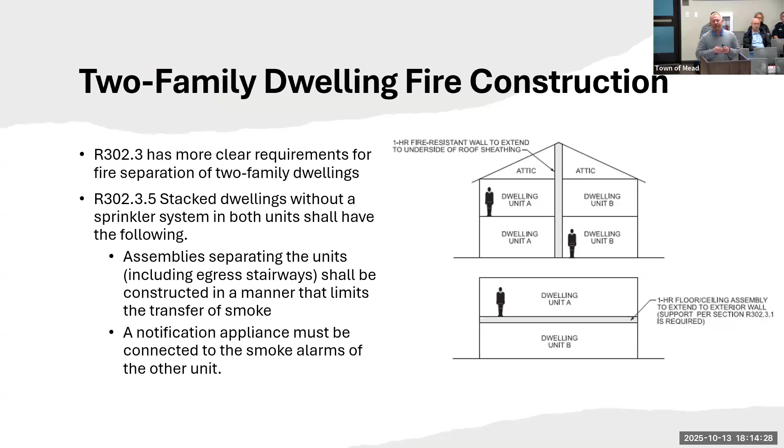There were some modifications to 2-family dwelling regulations. Years ago, we used to refer to these as a duplex, but the code has always referred to them as a 2-family dwelling. As you can see in the illustration, we can divide those in 2 different ways, either vertically in the top picture, or horizontally in that bottom picture, being 2 dwelling units, top and bottom.

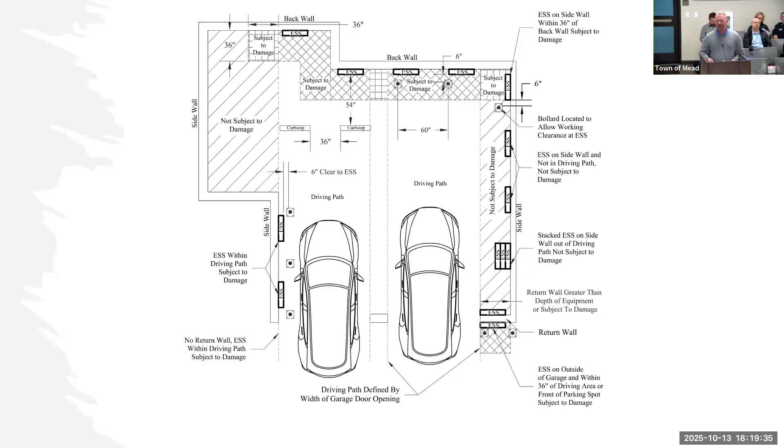This illustration might be a little hard to see, but at the back of the garage where those batteries are laid out, the hashed area is the area we're protecting. The area to the right of the vehicle parked on the right side of the garage would not be, because there's an expectation that the vehicle pulls in straight. We're protecting the wall at the back of the garage so no one can run into those batteries, and they can be protected with just a bollard system—a physical barrier that would stop the vehicle before impacting the batteries.

Some other clarifications in the code: additional supports for guardrails, whether that guardrail be at the stair or at the landing up top. This defines some more information, in the event that someone's leaning on that guardrail—and you can imagine if it failed, it could be a tragic situation depending on how far the fall is.

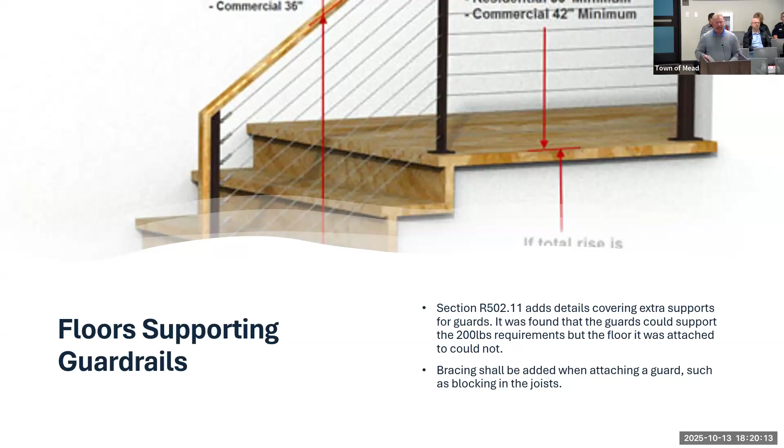Here's another minor update. Most homes these days probably have a deck mounted at the outside of the house. This gives some more clarification on how to create a weather barrier so that while that deck is attached to the house, it's creating a more long-lasting situation, resisting moisture getting back into the exterior wall of the home.

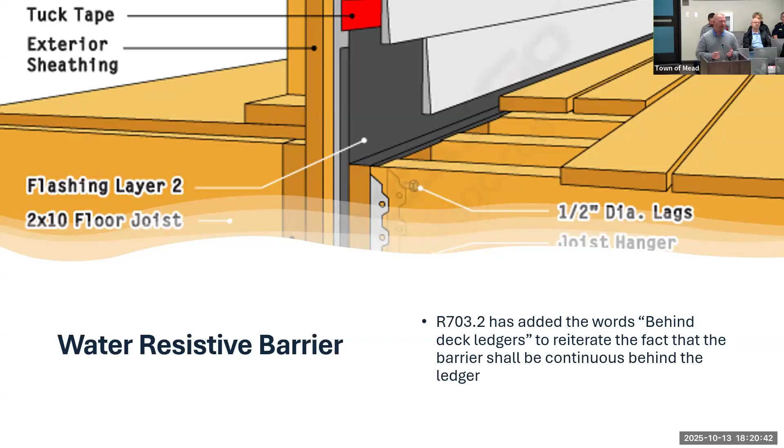Energy. I didn't make these slides, but I appreciate the...

So there's always been several ways to approach the energy code. We use the word energy code, and really that's just talking about the insulation on the exterior walls and the attic space of the house, maybe even underneath if there's a crawl space.

This is just outlining that there is a prescriptive method. The International Residential Code allows a builder to use the book prescriptively and follow its guidance. Now, because I'm familiar with Mead and some of the home builders that have been here in the past and probably moving forward, there's a simulated performance approach, which they're very used to doing. They have professionals on staff that submit documentation to us.

The simulated approach or performance might even lessen overall some of the insulation factors involved in those exterior walls and attic, possibly even with the ratings on the windows that are put into the home. But there is an equation that allows for manipulating these factors throughout the house, depending on its size, depending on the number of windows.

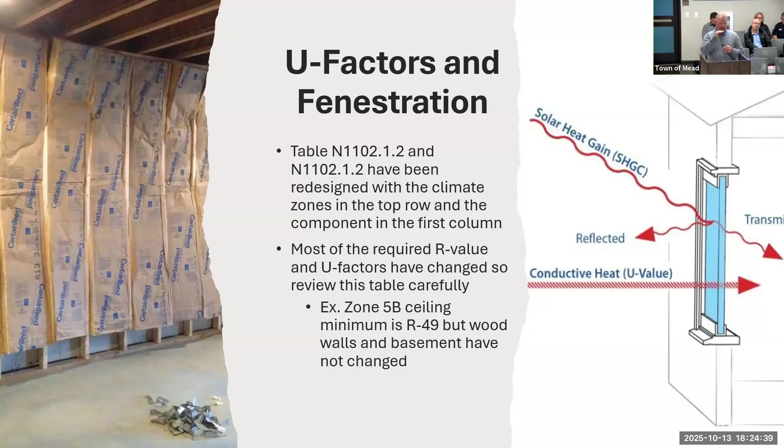So this is just a snippet out of the book itself. As you can see, the town of Mead is currently enforcing the 2018, and you can see a side-by-side comparison to what the 2024 will do. What you don't see is the comparison to the 21.

In the 21, say for instance, the ceiling R-value in the 21, as of today, if that were adopted, it would be 60. You see that the R-value for ceilings was 49 in 2018 and would remain the same.

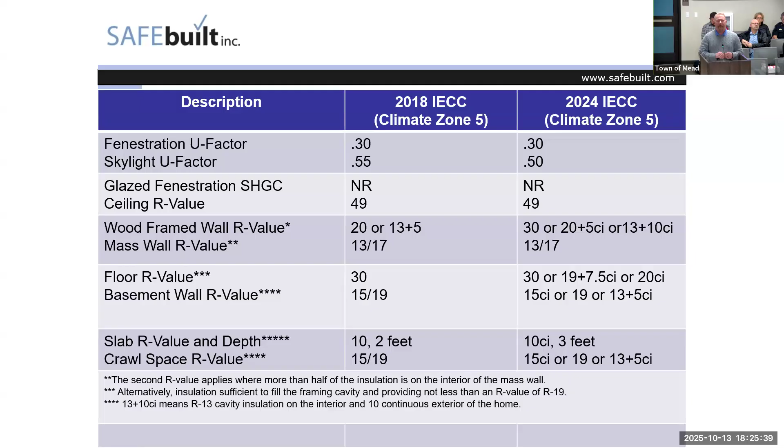There is an increase in the exterior wall or the wood-framed wall. But with insulation technology—blown-in insulation, closed cell, open cell, foam—these standards are pretty easy to achieve these days.

Duct leakage—this is something that we've always been measuring. When you're putting forced air through a mechanical system in your home, most everyone has what we call a forced air furnace with an air conditioner attached, that heats or cools the air within that unit and then pushes it into a duct system, in most situations formed out of metal.

So this process just measures the efficiency of that. They do a pressure test with a device like this, and overall it provides the most efficiency for that unit. It will also help lengthen the lifespan of it too.

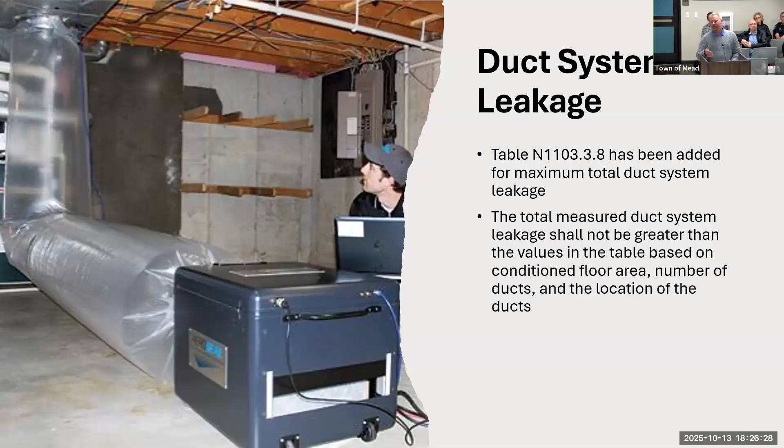Townhomes, so unit sampling—a builder that's building multiple townhomes could use this unit sampling out of this section of the book, along with that ventilation system or forced air furnace, so they're not going through to test every single unit. It really just provides a cost relief overall.

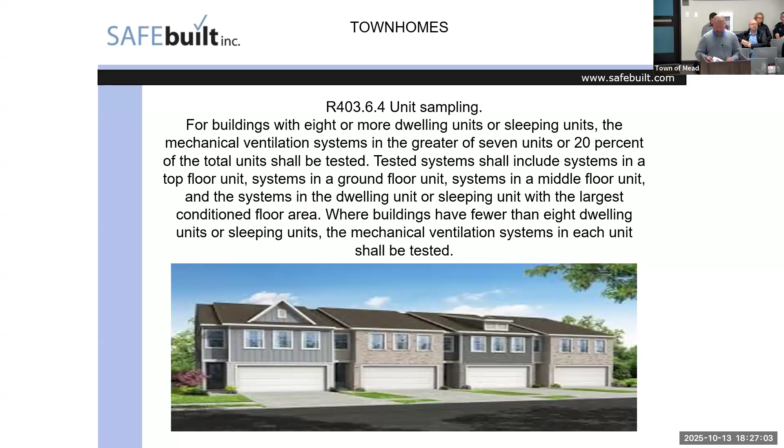All right, so now we're going to be more targeted on the energy code. Let's move on to the next slide. I think we can get into some more information on this.

So the Energy Heel Truss, that was created when going from the 2018 to the 2021. What this does, if you're familiar with this type of construction, is use a truss that has a very high heel at the exterior wall. If we insulate at the required amount in the middle of the attic space, as we get out to the edges at the exterior wall, that R-value gets thin.

So the Energy Heel Truss was created so that it kept that insulation more consistent, because we're losing energy—heating air and losing it through the attic space because hot air rises. So this was a method that helped mitigate that heat loss.

Now, I will say it is not required to use the Energy Heel Truss. There is a method to use a standard instead, because this could make the roof line look offset, or maybe a builder has a framing style they do not want to use this with. So there is a method to increase the insulation in the middle to create an average.

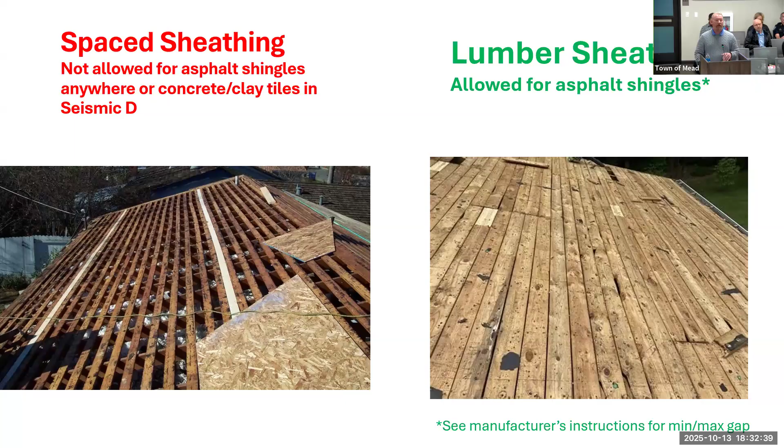Now, some minor changes to the mechanical code. As you can see, like a clothes dryer, because it's moving air and forcing that air outside — it's warming air to dry your clothes, forcing that air outside — this 100 square inch register is going to allow, if it's in a room that's closed in, we want to make sure we're providing what we call makeup air. We're forcing the air outside, and if it's in a small room with the door closed, now we're going to create a negative pressure inside the room. So it's a minor change, pretty easy to install a 100 square inch register that would allow air to pass through, maybe even from another part of the home.

The next section: exhaust openings can terminate 1 foot above windows and doors. I think we had a 3 foot requirement before that.

And this T&P valve — everyone has one of those on their hot water heater — they've condensed those requirements down in the book.

Now this refrigeration system — we see refrigerant change a lot over the years. It's mandated at a federal level as far as I know, so the industry has to react and change. The code will follow that, and then of course write in and include these new refrigerant types.

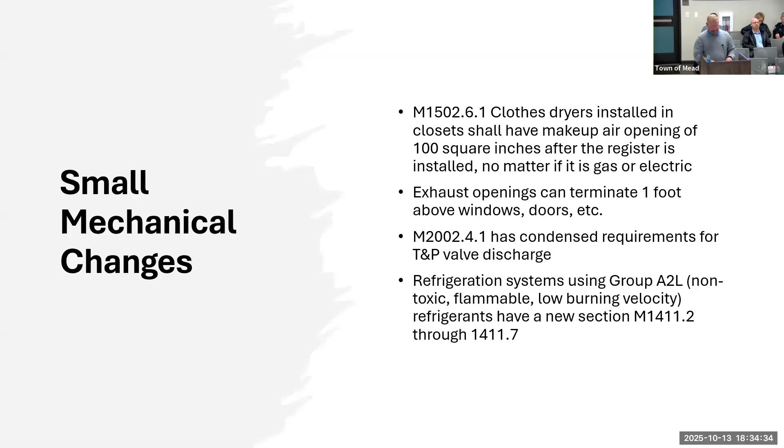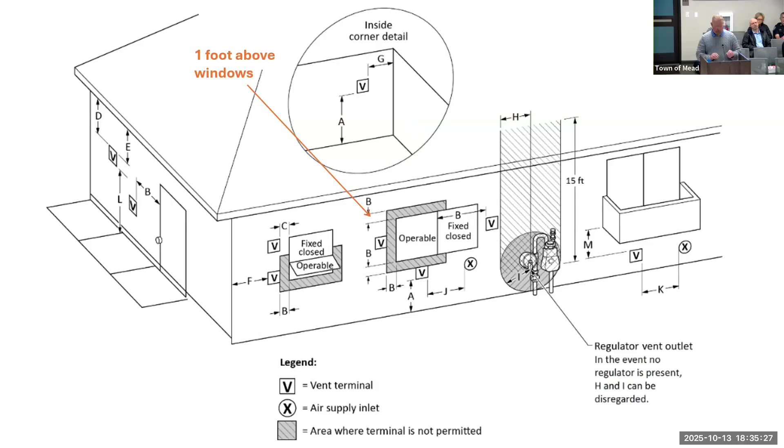The next slide is just outlining that one foot above a window or a door, whatever it might be.

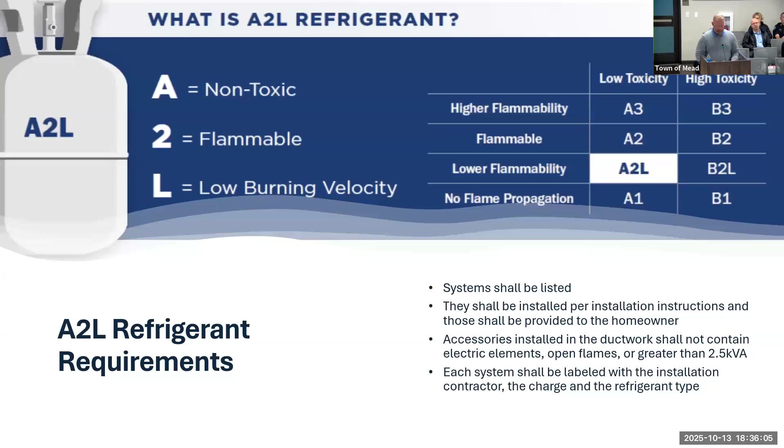A little bit more information here, though this isn't out of the code book, just general information about the new refrigerant. Everyone with an air conditioner unit will face this at some point when it needs serviced or replaced, because the old refrigerant type that's been in those units over the years is now not even allowed to be sold on the market. So things change, and that's not driven by the International Code Council, but more at a federal level and environmental.

This goes into the fuel gas section of the code book. This would apply every time you're supplying a furnace with natural gas, a water heater with natural gas, or even a fire pit or decorative fireplace that some homes have.

I like that they put this section in here: abandoned fuel gas piping shall be purged. We've had some moments up and down the Front Range of Colorado where there were old gas lines undiscovered, not part of the home, but through the property where the home existed. I can think of a situation about 6 to 8 years ago in Firestone, where a home was sitting on top of an old abandoned gas line. They built over the top of it, and it collected over time until it got to a point where a water heater pilot kicked on, or the furnace, and that ignition source caused an explosion in the home. So I'm glad they've defined this a little better.

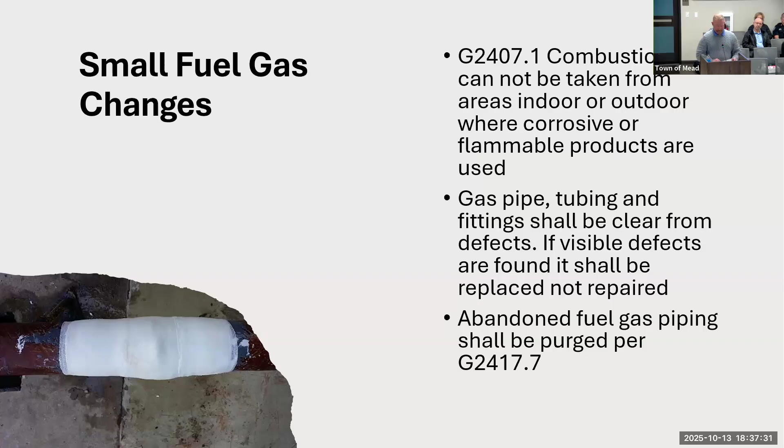Smoke and peppermint tests have been removed from drain waste and vent final testing. That was peppermint - I'm not of an age where I remember that being a popular method, it was many years ago. But you can imagine the strong smell of peppermint oil. They would introduce that to the inside of the drain waste and vent, or DWV, and then during the inspection process, walking down at each joint where it's glued or fitted together, we'd check for the presence of that peppermint odor.

I couldn't explain exactly why they've removed that, but I think it's probably a more antiquated testing style, because in my 22 years being in the field doing inspections, I've yet to come across someone that wanted to do a peppermint test. Now the smoke test is a similar scenario - we fill the pipe with smoke and then look for the area where that smoke visibly is coming out.

Air test has been replaced by a vacuum test. So instead of introducing compressed air inside of plastic drain pipe, which always carried a concern about that pipe bursting, now it's required to do a vacuum instead. This will require plumbers, maybe even HVAC professionals, to use a device that will put a vacuum, measure that vacuum, and let it sit for a desired amount of time to watch for any types of leaks that might happen.

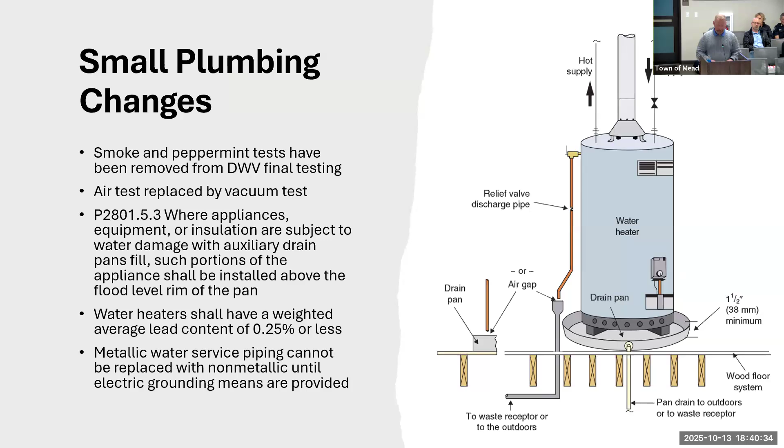Some reorganization of the appendices. Appendices, of course, are at the very back of the book - they are not recognized unless they are adopted by a council. This was just a reorganization of some of those. Some of them may not apply to a community of this size.

Now let's get into the Colorado Model Electric and Solar Ready Code. As you can see, it was introduced in July 2023. The code has become a requirement to adopt alongside the adoption of I-codes in the state. 90% of jurisdictions in the state have been using an updated version of the I-code, the International Code.

When the Colorado Energy Office formed in an effort to create more efficiency, the Colorado Model Electric Code requires that if you provide a gas dryer in a new home, you also have to provide the option for electric.

So if the person gets tired of using gas energy, maybe natural gas prices go up, they have the option to swap the dryer out with an electric version without having to go through a major expense, call an electrician, pulling in a new electrical line that would service that dryer.

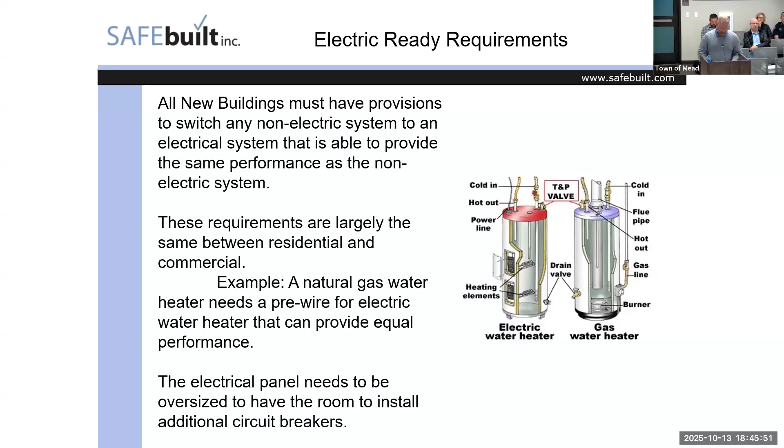And then you see at the bottom, so 2 spaces reserved for each appliance for a 2-pole breaker, because these appliances would require a 2-pole breaker, 240 volt. So as long as there's a dedicated space for those, they don't have to be installed. So that expense is not on the home builder, but it would have to be available - the space would have to be available.

All right, exceptions: a fireplace not used as a heat source or a main means of heating. As you can see the picture here, if you had a gas fireplace on your patio area outside, that's just decorative, so the requirement to provide an electric backup or source would not be required.

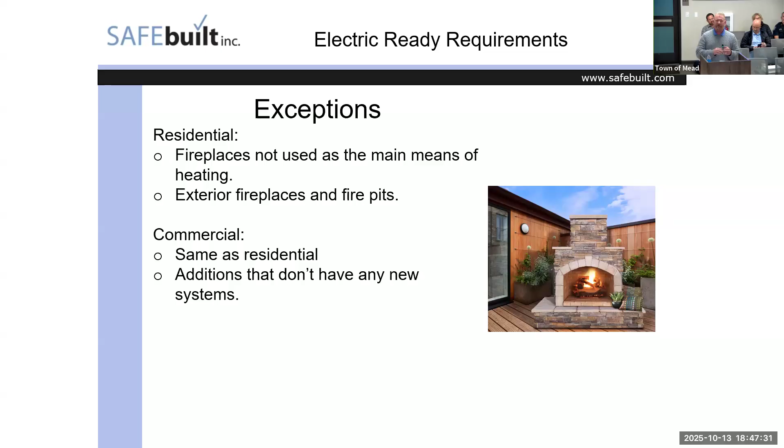So solar ready, this kind of just dives into the area on a roof. Most of us, if we don't have solar, just have shingled roofs or some type of roof covering. Most would meet these minimum requirements pretty easily - 300 square feet of space, oriented 110 to 270 degrees of true north. Any home that's built is probably going to have 4 sides to the roof in a sense.

So here's a good outline of a roof looking down. If you have driven past homes or have neighbors with solar, you've probably seen a similar situation. Again, some of these requirements are just reiterated in this slide, and you'll see at the bottom, a dedicated space within the panel.

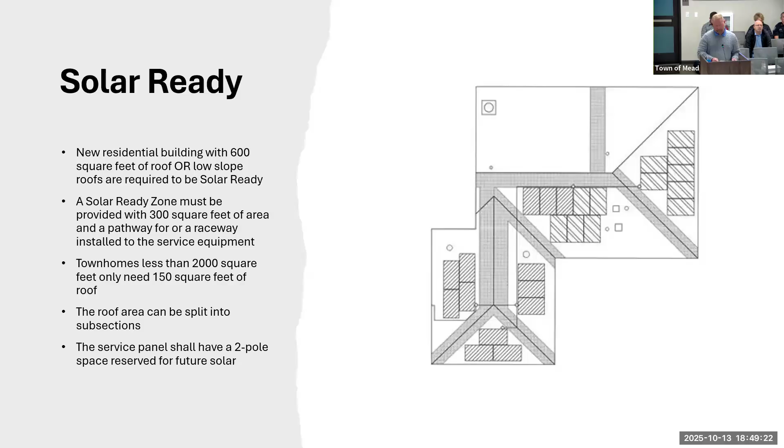I'm going to go to the next. Oh, there you go.

So this is targeting commercial - new buildings and major additions and renovations. Now the consideration of major, if it's an addition to a commercial building and if it's substantially increasing the square footage, to be honest I'd have to research what percentage that might look like, or a major renovation. If we're just renovating the interior of a building, that's not considered a major renovation. We would have to disrupt the exterior, disrupt the roof, and then maybe we're falling into that major renovation category.

And again, the language is similar - the orientation, the location of the area for the panels.

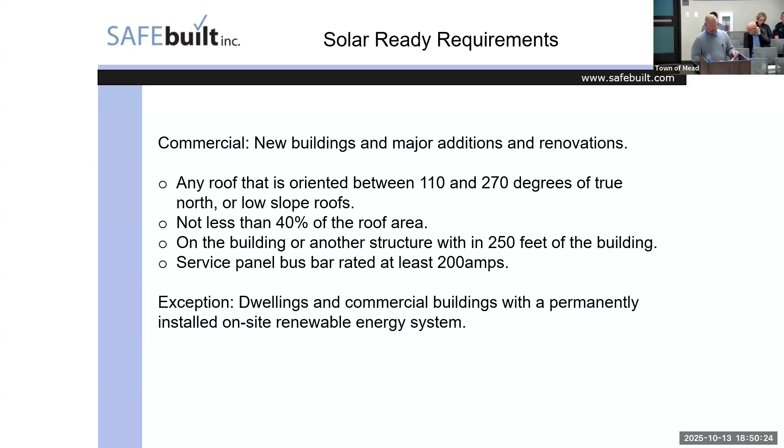So this is defining, we have 3 different levels there. EV capable, if we have space in the panel. EV ready, we have a panel with dedicated space and an outlet installed that can accommodate charging of an electric vehicle. And then installed, you see the charging station itself, whatever that might be.

I personally don't have an electric vehicle. I have a few friends, I think, that have them. It seems like their options are getting some type of charging device to charge the car quickly in the garage - a lot of expense in that, I think - versus when they purchased the vehicle, it came with some kind of charging cord they can plug in their garage to accommodate the charging of the vehicle. It takes longer, but you know.

So the EV ready is what we're focused on in the middle. We're going to make sure that when the home's built, that receptacle, meeting these minimum requirements - 40 amp, 240 volt - is available. I like to describe this like if I was building a brand new home and maybe I don't have the desire to purchase an electric vehicle - the average homeowner is in a home 6-7 years maybe, they sell the home, they move on, maybe they downsize, maybe buy something bigger as the family's getting bigger. They've sold it to someone else that has that EV car. So instead of that new homeowner having to tear the walls open, pull a new electric line in, maybe upgrade the panel, whatever it might be, this kind of circumvents that.

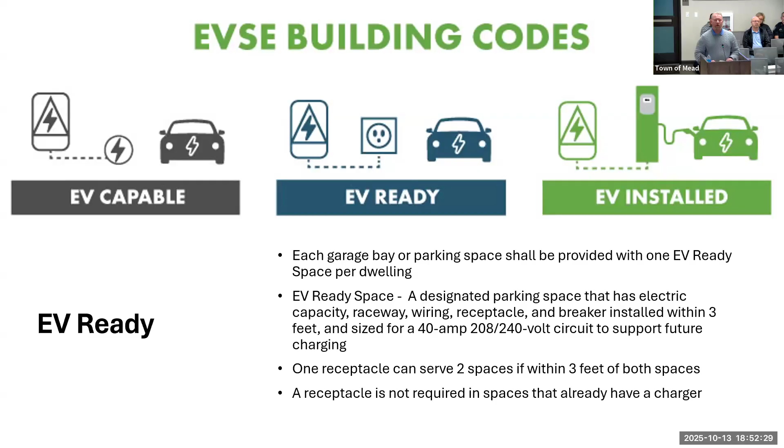We will go into the spaces, and I believe there is a slide that shows that. The Colorado Energy Office requires a charging station for each vehicle parking space. So if you have a 2-car garage, there's 2 parking spaces available. But there is a provision or exception that allows - if you're within 3 feet of the space - then 1 receptacle dedicated to EV charging can service both. They recognize that even if you had 2 EV vehicles in your home, you could charge one then the other, or accommodate both spaces with the single receptacle provided.

So I apologize, I'm not fully aware what that acronym stands for. David, would you?

So these things, our team or any inspector would be verifying these requirements are met based on the Colorado Model Energy Code. Obviously our team would do inspections on every aspect of the house during the building process. But then we're also going to make sure we're meeting this so that we can follow the state standard and not put the jurisdiction in any kind of jeopardy for not meeting that statute.

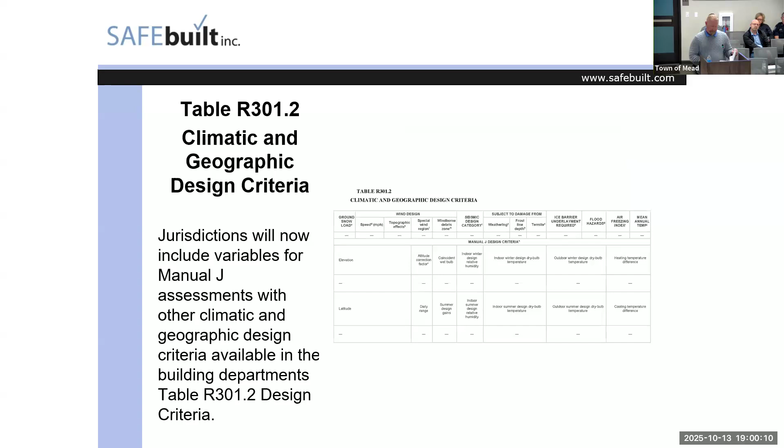Wind speed conversion, that's where we're taking what we refer to as a 3-second gust of wind and what we refer to as ultimate wind. So a 3-second gust or higher is sustained. In this area, I'll throw a number out, I don't know exactly, but it's probably around 115 to 120 miles an hour. You don't see that on a normal basis, but referring back to the Marshall Fire, I know they were having sustained constant wind at over 100 miles an hour, and that's what caused that fire to move so quickly. And that, as the crow flies, is not that far.

That's just based on this mountain range behind us. That inversion happens, that cold air drops, it gathers speed, and by the time it gets here, it's pretty powerful.

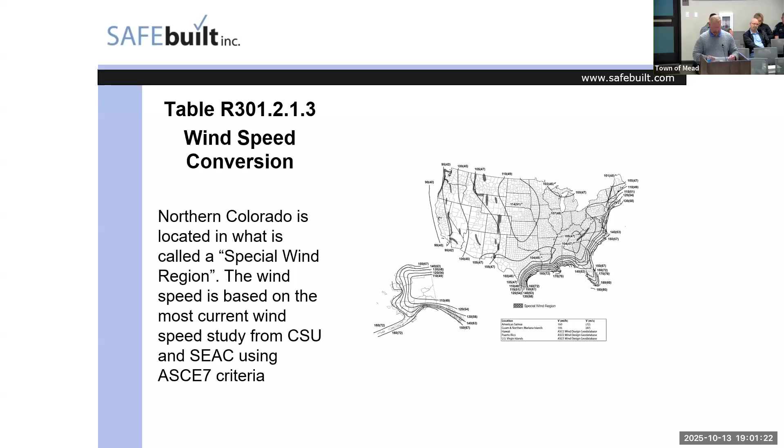Exposure category, this just defines where this comes from, the ASCE. These are groups of engineers that have done studies to determine different parts of the country, and this would be from coast to coast.

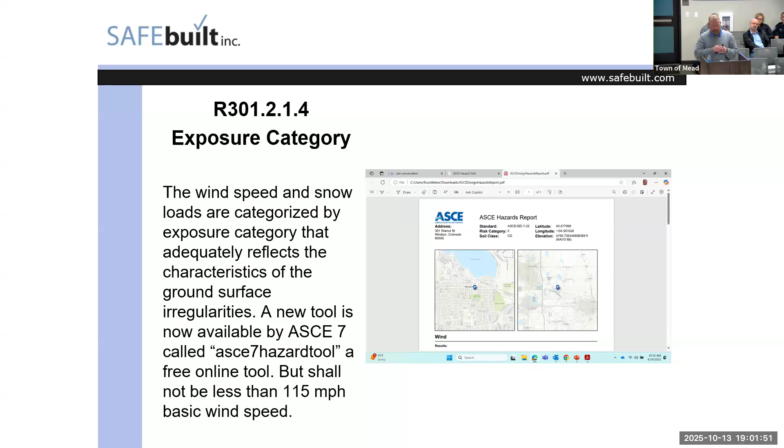We kind of touched on this earlier, 2-family dwelling or paired home or duplex, all words that we've used over the years. I think it's just adding new language. We've always had that requirement to have fire resistive rating between them, but this section is just defining that better.

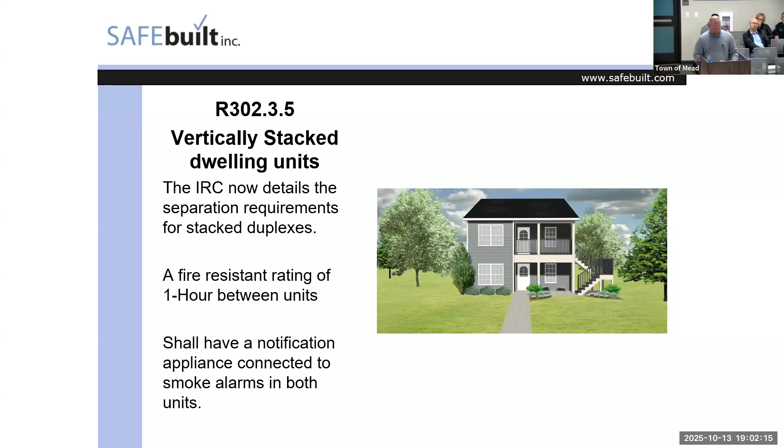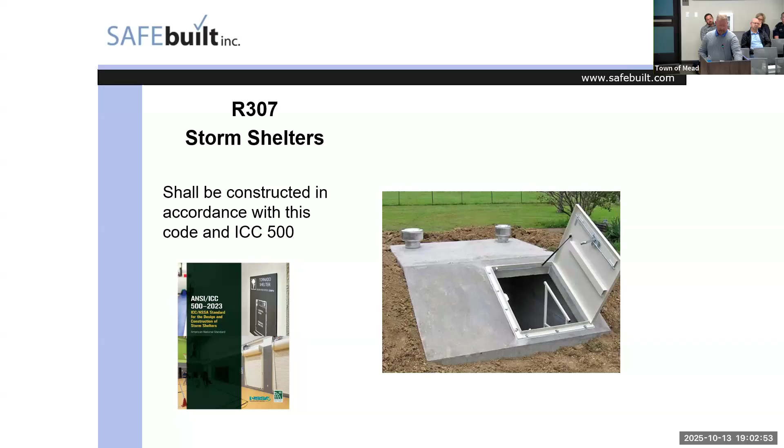A new standard that addresses lead content in drinking water. Obviously I feel like we're so much further away from that than we were many years ago, but it still becomes an issue in certain parts of the country. The code is written for international use, so some things may not pertain to the town of Mead, Colorado, but the book is written to accommodate areas all across the globe.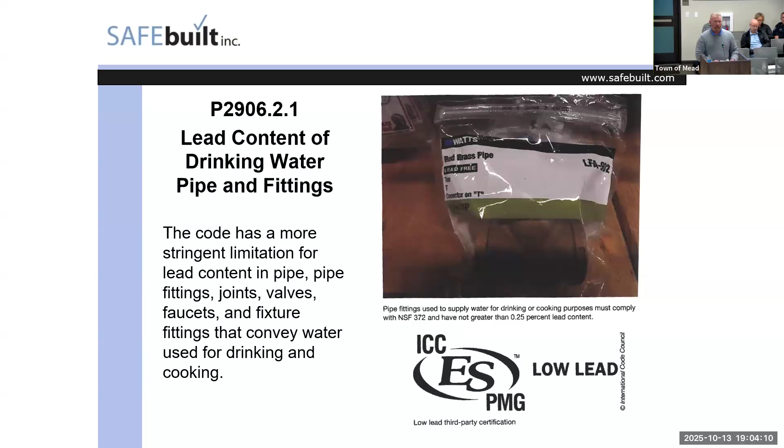A little tiny dive into the IBC, this would be your International Building Code, which governs commercial buildings.

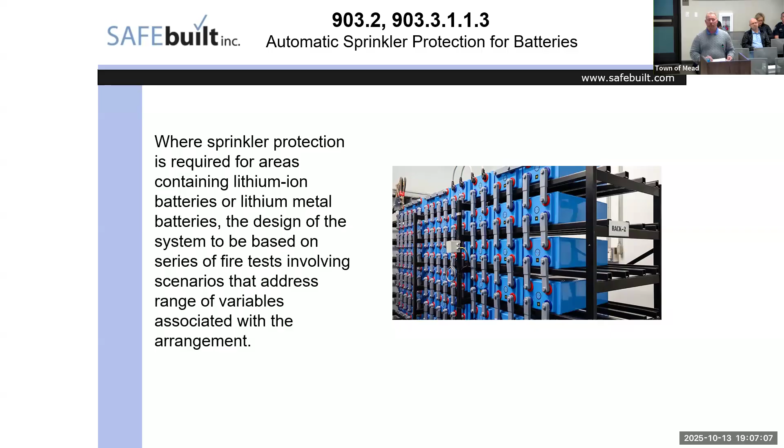And we talk about egress doors. Of course, in this building, we have egress doors, everywhere you see the marked exit, however we can get out of the house. In a single family home, your main egress door would be your front door that you're used to walking in and out of.

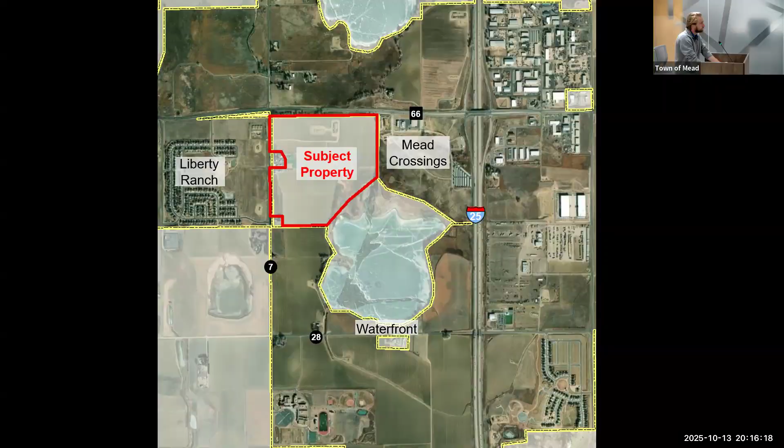In order to be eligible for annexation, the property in question must conform with several requirements outlined in the Colorado Revised State Statutes. These requirements include that 100% of property owners must have signed the annexation petition, that no other municipalities have commenced annexation, the property will not be detached from the current school district, the annexation will not separate or subdivide any land held in identical ownership, and the annexation will not extend the town's boundaries more than 3 miles in any direction.

With this proposed annexation, they meet all of these requirements. There's also a contiguity requirement - state statutes require property to have at least one-sixth contiguity with existing town boundaries. Shown on the screen are the proposed annexation boundaries for the property, with the areas in red being the parts contiguous with existing town boundaries. The proposed annexation is well in excess of the required contiguity, providing about two-thirds of the property perimeter contiguous to existing town boundaries.

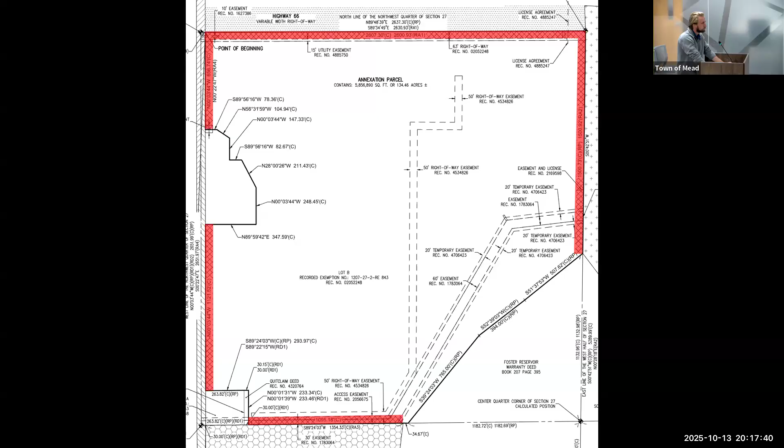So, pretty fast there, but the Planning Commission also heard this back on September 17th, and they recommended approval of this eligibility resolution. With that, staff also recommends that the Board of Trustees approve the eligibility resolution. I'm available for questions, and our applicant is here as well, and I'm sure he's able to answer any questions you may have.

Colin, does the applicant have a presentation tonight? No. Okay, thank you very much.